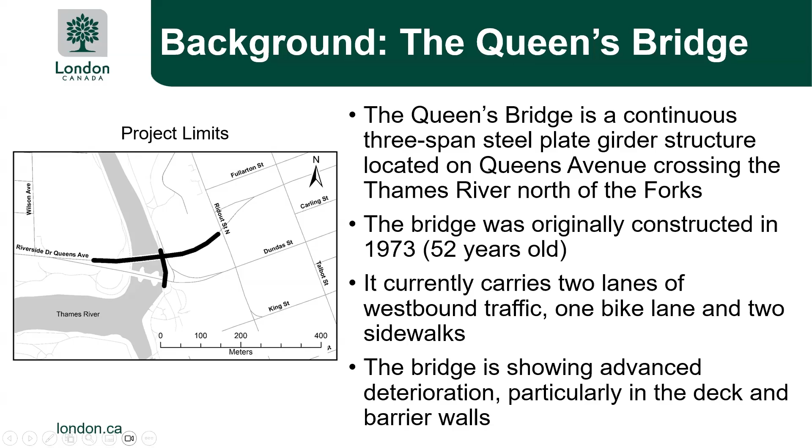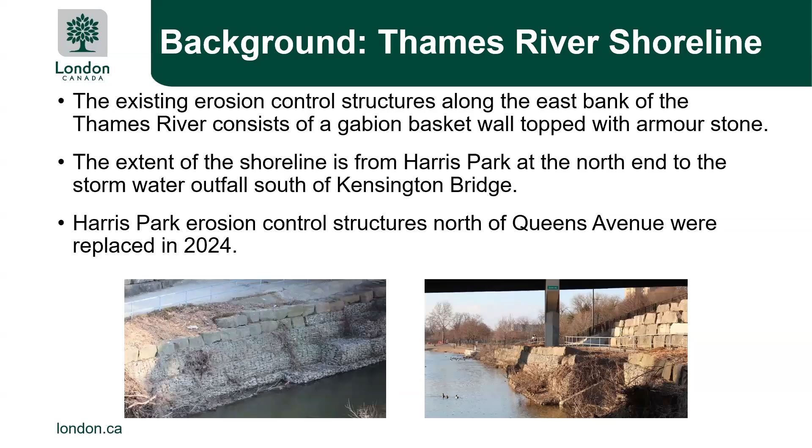As part of this project, the extent of the shoreline extends from Harris Park on the north end, along the river, south of Queensbridge, south of Kensington Bridge, and then just south of Kensington Bridge, there's a stormwater outfall, which is the end of the extent of the project. And I will just note that some of the erosion control structures north of Queens Ave in Harris Park were replaced in 2024, and some of that work was wrapped up earlier this year.

It's just looking at some past assessments and studies that were done on infrastructure in this area. So in 2018, there was a cultural heritage evaluation, as well as a preliminary structural design and structural evaluation carried out for the Queens Bridge that looked at the condition and what recommendations are required for this bridge. In 2019, there was a transit project assessment process that was done by the City of London for the Rapid Transit project.

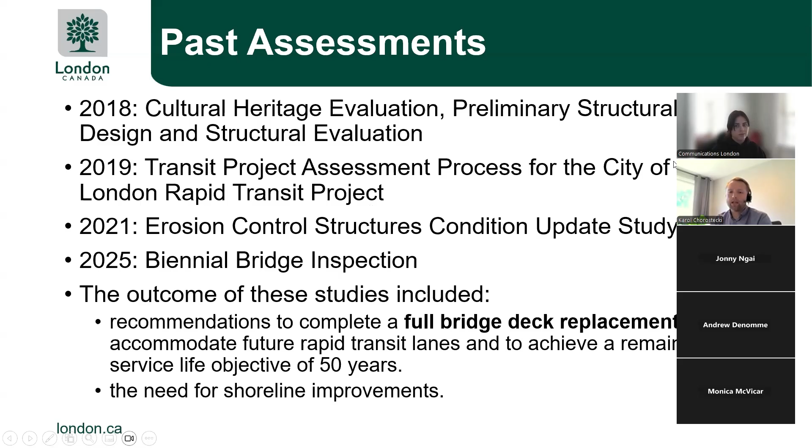So that looked at widening of Queens Ave to accommodate future rapid transit. In 2021, there was an erosion control structure condition update study. So that looked at the shoreline along the Thames River, looking at the condition and providing recommendations for the future. And then in 2025, the Queens Bridge had a biennial bridge inspection completed. So every bridge in the city is looked at every 2 years. So the latest inspection was in 2025.

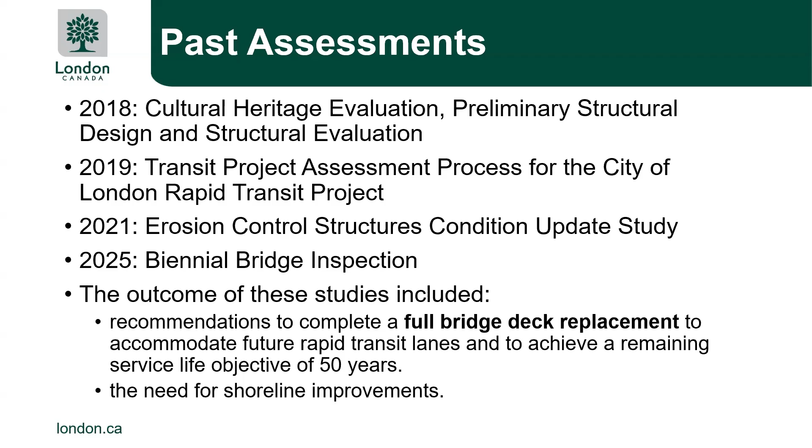Basically, after all these assessments and studies, the outcomes include a recommendation to complete a full bridge deck replacement for the Queens Bridge, and that'll happen to accommodate future rapid transit lanes and extend the remaining service life for another 50 years. As well, there were recommendations for the need for shoreline improvements along the Thames River on the east side. It's just giving you a bit of an overview on the design.

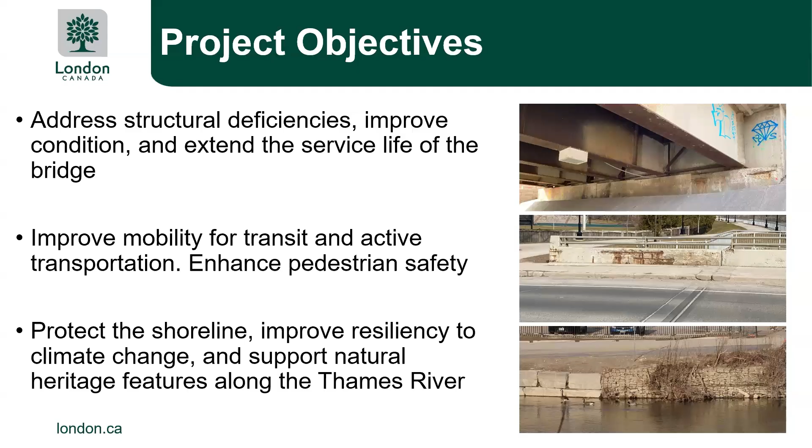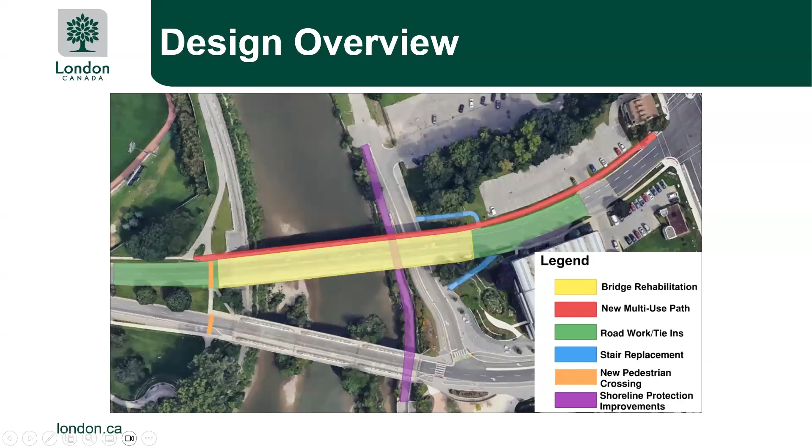On the west side of this graphic, you can see in orange some new pedestrian crossings that'll be installed across both Queens Avenue and Riverside. And finally, on the east shoreline of the Thames River in purple, you can see the extent of the shoreline protection improvements that we'll be doing. So as far as the bridge rehabilitation, we'll be looking to replace the existing exposed concrete deck, and we'll be eliminating the deck joints on the bridge. A lot of times at the ends of the bridge, you'll find deck joints. Over time, those joints can leak, which then affects the structure below the roadway. So in order to prolong the life, we're looking to put in a different detail so that we can eliminate those deck joints. We'll also be replacing the barrier walls and providing an updated railing.

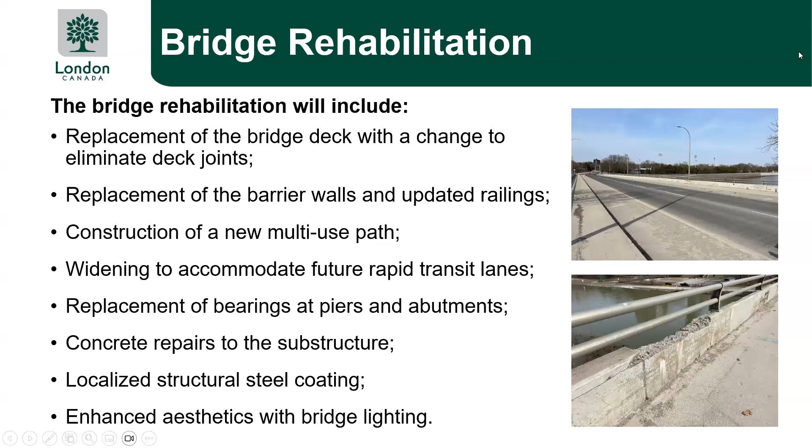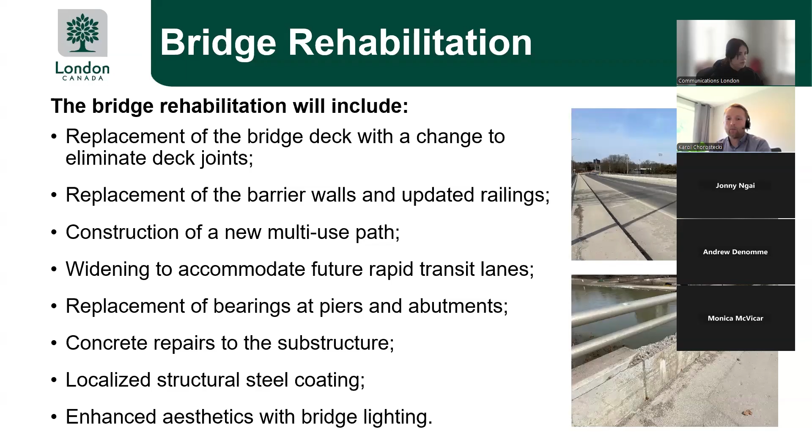So just looking at the existing cross section of the bridge, we can see here, currently the bridge is just under 17.4 meters wide, and we have got two westbound lanes and a sidewalk on both the north and south sides of the bridge, as well as parapet walls with steel railings. And you can see in the current sidewalks, we've got a number of utilities that cross the bridge on both the north and the south. And then we've got an abandoned gas main hung underneath and a water main on the north side.

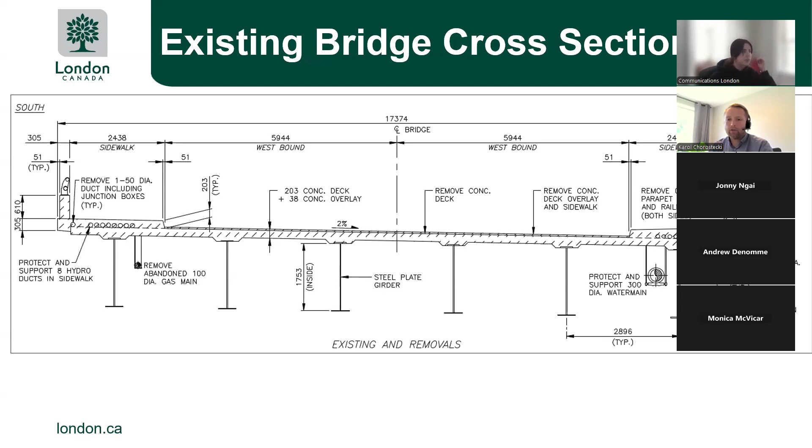So just flipping to the next slide here, we've got the new bridge cross section. So you can see here, we've widened the bridge to 18.85 meters, so just under 1.5 meters widening. And that's to accommodate two westbound through lanes. It will also provide a westbound bus lane. And then we do have room for a future eastbound transit lane that can be accommodated.

We've eliminated the sidewalk on the south side to provide room for that future eastbound transit lane, but we have put in a wider 3-meter multi-use path on the north, complete with new concrete parapets and steel railings. And then you can see the utilities have been moved because there's no sidewalk on that south side anymore. Those utilities will be relocated to be underneath the bridge between the girders. As well, we'll be eliminating the abandoned gas main, and then the water main will remain in place.

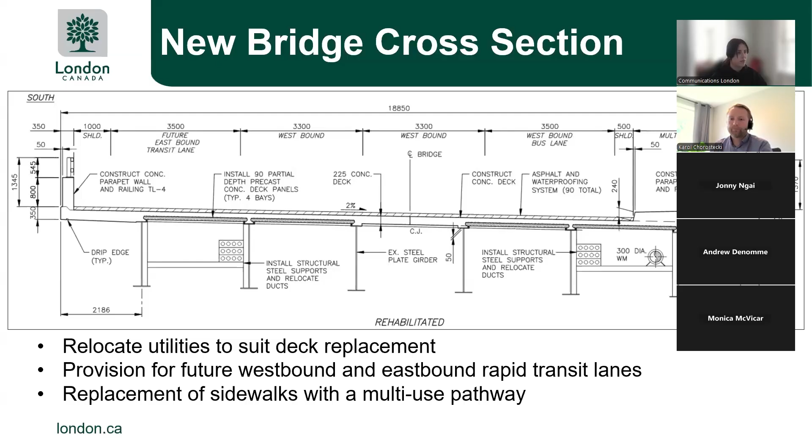So looking at some of the road work that'll happen as part of this project. We'll be doing some underground utility replacements. The north sidewalk will be removed on the northeast side, and that'll be replaced with that 3-meter multi-use path extending from Rideout to the bridge and then across. There will be some road widening that will be required at the bridge approaches just to tie in the roadway to that new bridge cross section.

As well, we'll be adding the new pedestrian signal crossing on the west end of the bridge, and that'll provide increased connectivity for the Thames Valley Parkway. And we'll be replacing the existing stairs connecting the sidewalks from Queens Avenue to Harris Park Gate, which you can see in that bottom right photo.

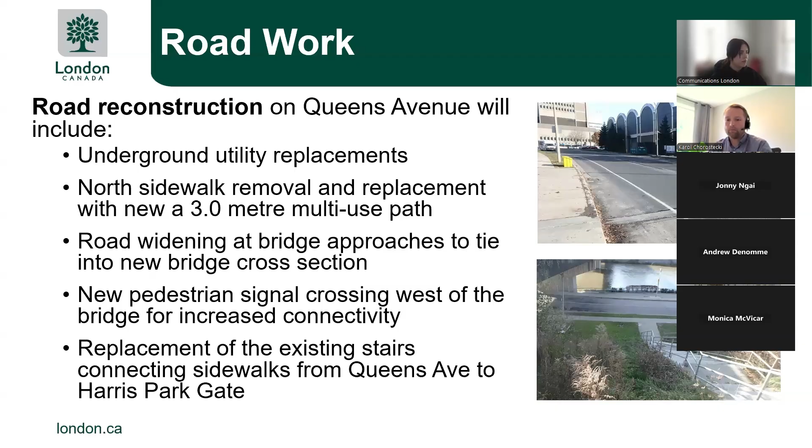So looking at some of the erosion control and Thames Valley Parkway path reconstruction. In the left photo there, you can see that's the existing gabion basket retaining wall. A lot of the steel baskets are corroding. This photo doesn't show it well, but there are sections where some of that stone is missing, and you can see that there's some vegetation growing in that as well. So we'll be looking to replace that aging infrastructure to continue protecting the shoreline.

On the right-hand photo, you can see that's the West London Dyke. That's a mechanically stabilized earth system that's been installed along the west shoreline. So we'll be looking to match something like that aesthetically on the east side for continuity. And then there's also a pathway at the top of this retaining wall, so we'll be looking to replace that pathway and provide some improvements. And just to note that the work we're doing here will tie into that recent Harris Park shoreline just to the north.

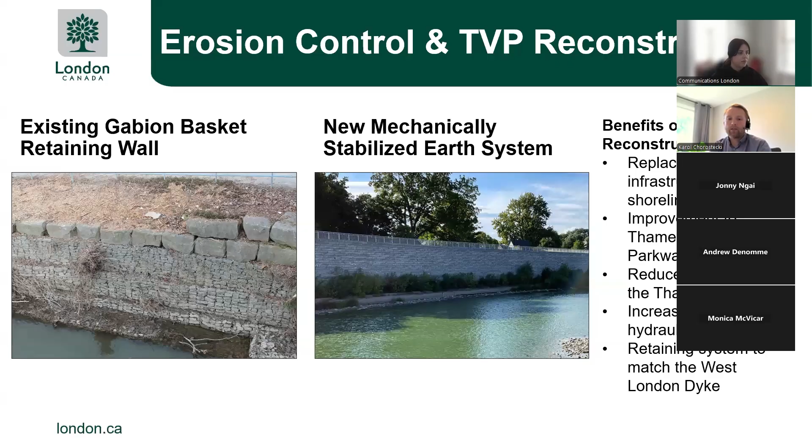So as part of this construction, we will require some tree removals. We are looking to limit these as much as possible. However, to gain access and provide the contractor with sufficient laydown, there are some trees that will need to be removed, so we've highlighted those here. Starting on the west there, you can see there's some trees in the median between Queens Avenue and Riverside that need to be removed. As well on the north side in the park, there's two small trees there that'll have to be removed. However, we've identified the large trees adjacent to Labatt Park. Those will be protected during construction.

And then there's some vegetation removal that's required along the Thames Valley Parkway, noted in green there. In removing the existing wall, that vegetation will have to be removed, as well at the stairs on the east end. On the north stairs, there's some vegetation removal, and then on the south stairs, there's actually some trees growing in that embankment that'll also have to be removed. And then there's a number of trees close to the museum, and those will be protected during construction. Following construction, as part of site restoration, there'll be some new plantings included to compensate for these removals.

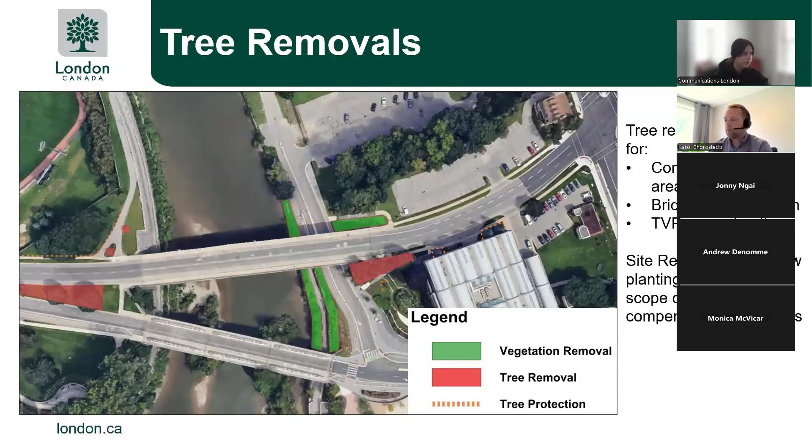So to give you an overview of construction, the approximate construction duration that we're looking at would be from March 2026, ending in December 2026, with some finishing touches in 2027. The bridge rehab will be completed in 2 stages to maintain traffic on Queens Ave. During the stage construction, westbound traffic on Queens Ave will be reduced to 1 lane, but the bridge will remain open. There will be some short duration bridge closures with traffic detours anticipated. However, we'll be trying to minimize those as much as possible.

Harris Park Gate, located below the bridge, which is the entrance to Harris Park, will be closed for the duration of construction. That's to allow the contractor some area for staging and storage. We will maintain access to Museum London throughout construction.

And we will have some temporary detouring for the TVP during construction, noting that we are rebuilding a section of the TVP, so that needs to be closed off and detoured. And then, as noted previously, there will be some tree protection installed, and that'll be maintained throughout construction to protect the trees that are not designated for removal.

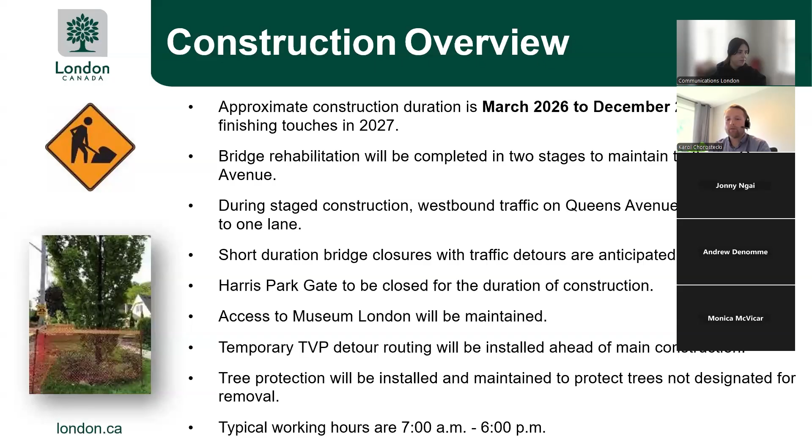So looking at some traffic and pedestrian management that'll take place during this construction. For the bridge, just looking at the construction staging. So in stage one, there'll be some traffic control measures that are installed to maintain that single lane of westbound traffic, as well as the sidewalk will remain open, and that'll allow us to remove and reconstruct the north half of the bridge. Once that north half is constructed, we would shift the traffic control measures to maintain that westbound lane on the new portion of the bridge, and that'll allow us to remove and replace the south side.

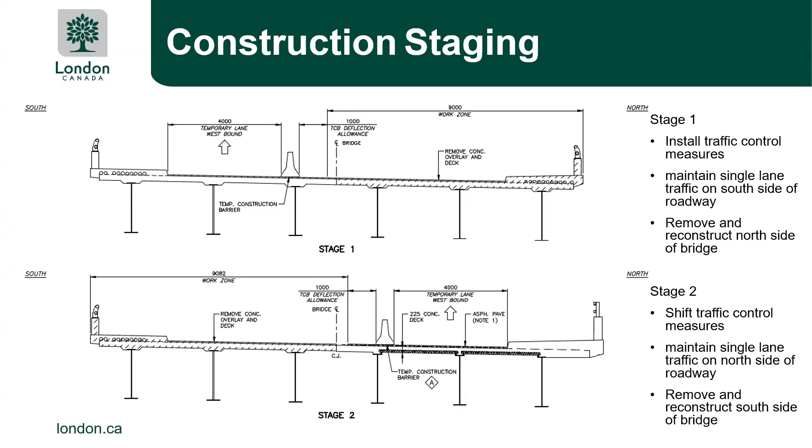Taking a look at the TVP detour routes. So as I've noted, the TVP will be closed on the west side of the river. The TVP will be closed at Rogers Ave in the north, and that'll be extended down to Queens, and then the pathway that goes underneath Queens and Kensington will also be closed. I will note there is another project happening in Mitchell A. Baran Park. So the TVP in that section will be closed as part of that project as well.

So detouring for someone that's coming southbound on the TVP, they would be directed to exit the TVP onto Rogers Ave and then make their way westerly to Wilson Ave, and then to the south to Riverside. And then at Riverside and Wilson, there is a pedestrian signalized crossing that'll get you to the south side of Riverside. And then from there, there is a bike path and sidewalks that can take you either east or west. Coming northbound, so crossing Riverside at the signals, again, you'll be directed to go north on Wilson, east on Rogers, and then that'll connect back to the TVP going north.

On the east side of the river, we'll be closing the TVP at the south side of Harris Park, and that'll extend both to Dundas along Harris Park Gate and to Ivey Park on the pathway that goes below the bridges. So for the detouring for that side of the river, for southbound TVP users, you'll be directed from Harris Park to take Harris Park entry up the hill to Ridout, and then you'll go south on Ridout down to Dundas, east on Dundas to Kensington Bridge, and there's the signalized crossing there to get you south back on the TVP.

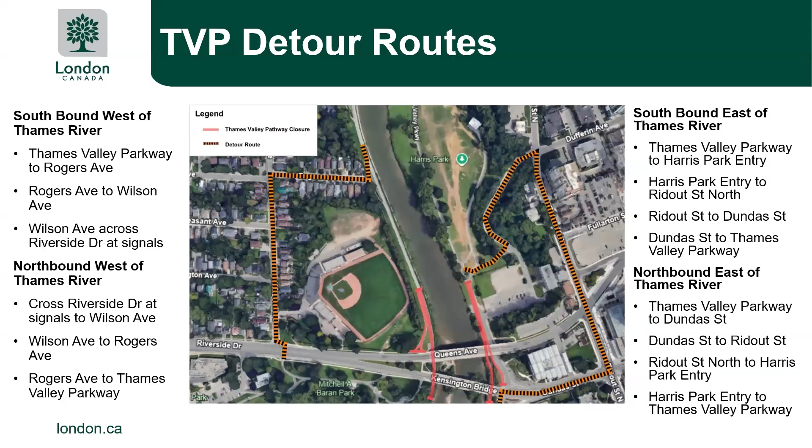So looking at mitigating the construction impacts, the city will continue to emphasize communication and coordination to minimize any potential impacts to residents, businesses, and events during the construction. So there are some resources that'll be provided to businesses to help navigate the construction. As well, there'll be some wayfinding signs posted to help communicate construction plans, detours, and timelines.

And I just wanted to add that we are consulting with the city's special events department and the Rock the Park just to coordinate construction with some of the events that are taking place in Harris Park during 2026.

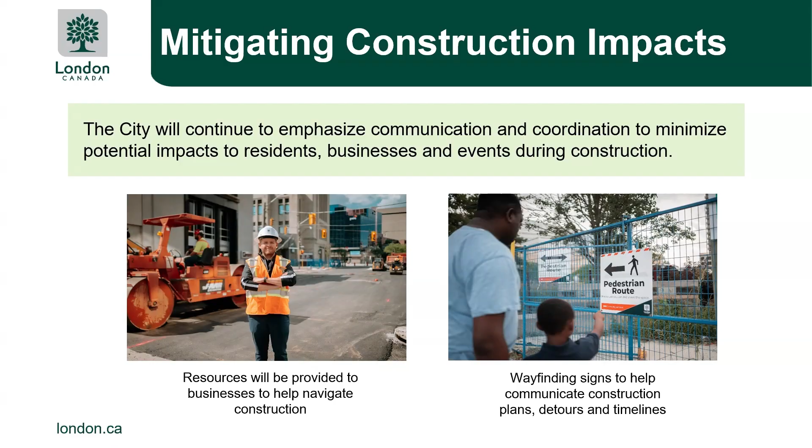And taking a look at the project schedule, so looking at the activities that are happening between now and construction. So we're currently in the detailed design phase, and that's slated to be completed in the fall. Following that, there'll be some advanced tree removals. So that'll be happening either in the fall or winter 2026. The project is planned to be awarded in early 2026.

And then advanced construction notices would be put up 2 weeks prior to construction. There's some bird mitigation measures, so bird netting on the bridge, that'll happen in March of 2026 before construction starts. And then construction would commence in the spring and continue to December 2026. And with that, I'll pass it back to Taylor.

Awesome. Thank you. So we will be having an in-person drop-in session on Tuesday, September 16th from 5 to 7 p.m. at Museum London. You can scan the QR code that will bring you to the Get Involved webpage where you can opt in for email notifications at different project milestones, or you can contact the project team anytime. And the contact information is on the screen there.

So we will now begin to take questions. To ask your question, please use the Q&A feature on Zoom. This icon is located at the bottom of your screen and is marked with the word Q&A. Your comments are also welcome, and we will be collecting all of them for the project team to review after the meeting. If you have any questions about specific properties or details you would like to discuss individually with the team, you can leave your contact info in your comment or can connect with us directly by email, phone, or submitting your question through the Get Involved webpage. So let's dive into some questions.

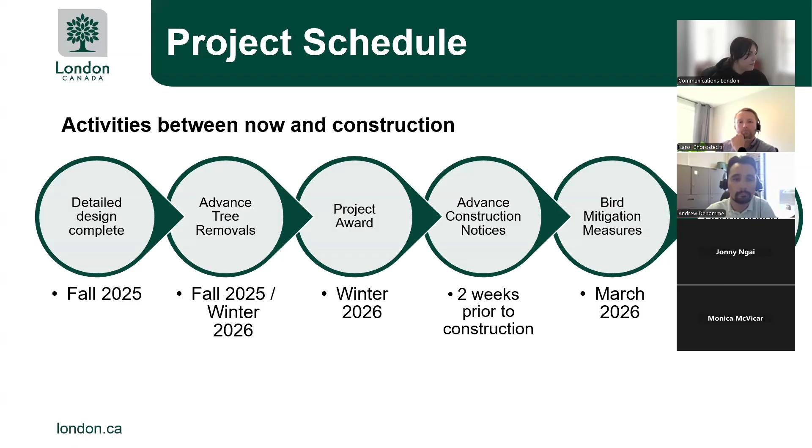Yeah, sure. Taylor, if you want to flip back to that slide that showed the staging, I can talk about that a little bit more. If you go back one more, one more. That one there. Yeah, perfect. So because we're doing the deck replacement in two stages, we've identified zones on either end of the bridge in yellow there.

We're showing across the whole roadway, but the contractor would use one side depending on which side of the bridge they're working on. So they would have some storage, or I guess equipment, on top of the bridge on either end because we are removing that deck. So both ends are required.

And then down below on Harris Park Gate would be the majority of any stockpiling of materials and equipment. Depending on how the contractor ends up constructing this, there may be a need for a crane set up down below. But we'll see how the contractor plans their work. Hope that answers the question.

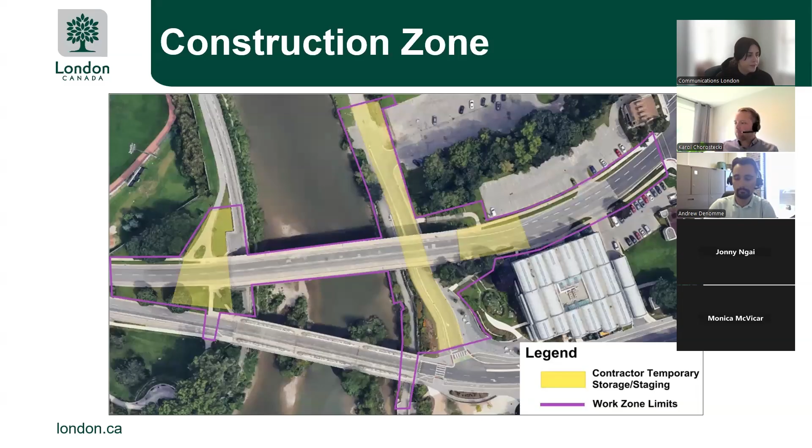Okay, I'm not seeing anything else, but I'm just gonna leave it open for a couple more minutes. If anyone's joining us late and has a question, please throw it in the Q&A down below. Okay, I'm not seeing any more questions come through. So, oh, let me just double check.